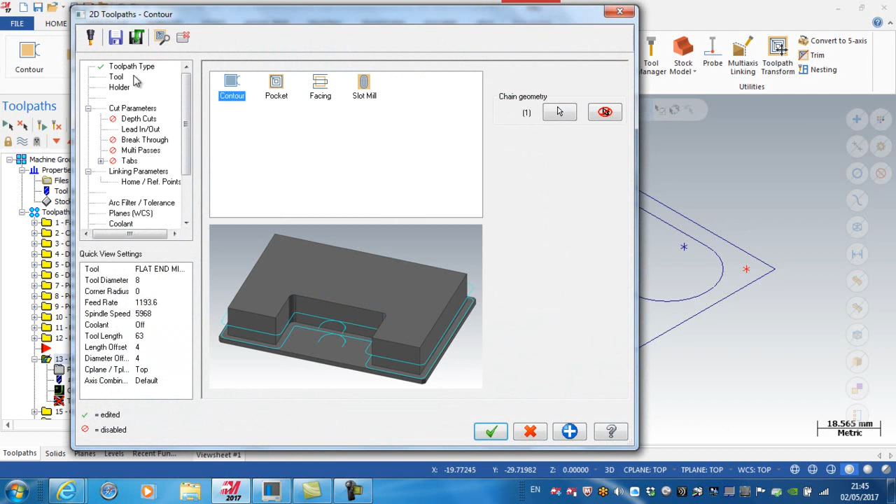Therefore the tool remains the same with the same speeds and feeds. I'm just going to put a comment in here: Finish 18mm diameter. I'm going to look at the cut parameters, and here I'm going to ensure that the compensation is set to control. Therefore I can change the size of the hole by modifying the radius value of the tool.

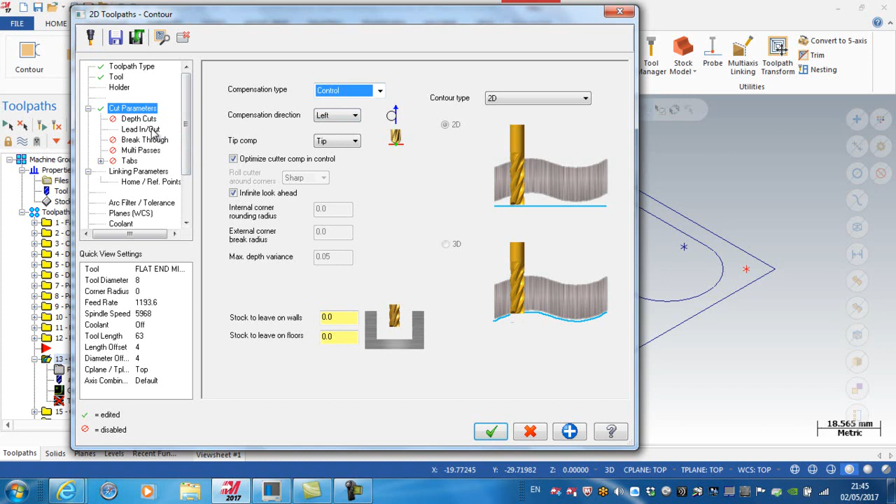In other words, this will output a G41 or G42 in my code. My cutter compensation is to the left, so obviously it's going to be a G41 in my code. Stock to leave in the walls is 0, stock to leave in the floors is also 0. And I need to put a lead in, lead out - I'm just going to go with the defaults for now.

We look at my linking parameters, and again everything is set to absolute, so I'm going to have my final depth as -11. Okay, my feed plane at the moment is set to -10 absolute, so I might just put that back up to 3 for now. If I was to verify this, I'm going to select the pocket and press and hold the control key.

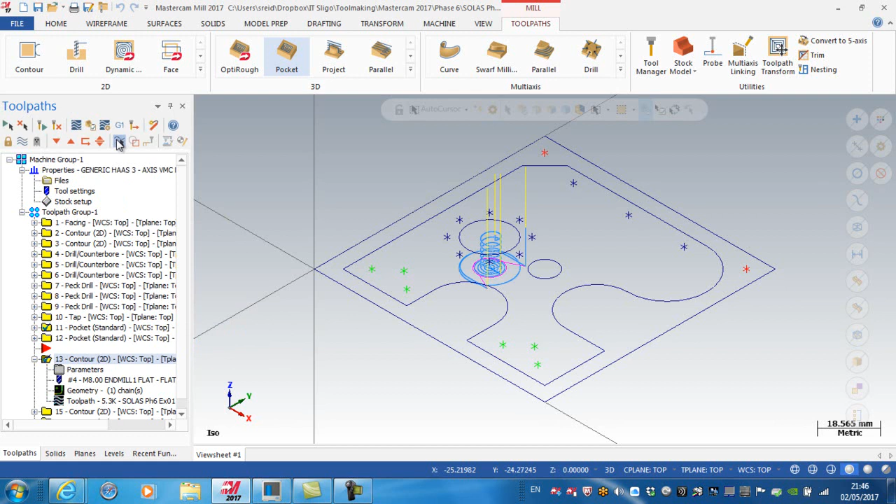Which allows me just to select those two operations. So I'm just going to verify those two operations. Okay, and I'm going to play. So this is my pocketing operation, and now doing a contour.

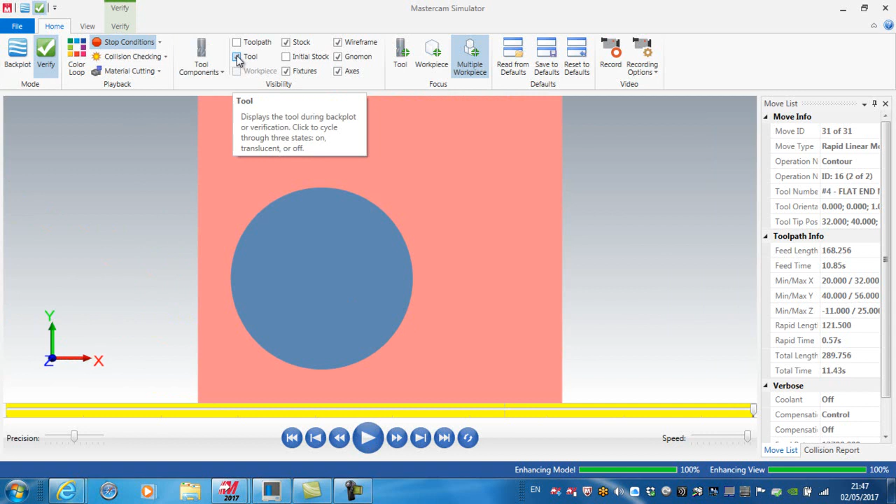So if I was to look down at the top and not show the tool, I'll actually make it invisible. You can see now that obviously my lead in, lead out is causing this issue, creating this unwanted slot, we'll say, on this side of the pocket.

So close down my verification. I'm going to regenerate the selected operation. Okay, so what Mastercam does here in this situation is the tool comes down on the center of the blue line, okay? And as it travels along the blue line, it will apply its cutter compensation.

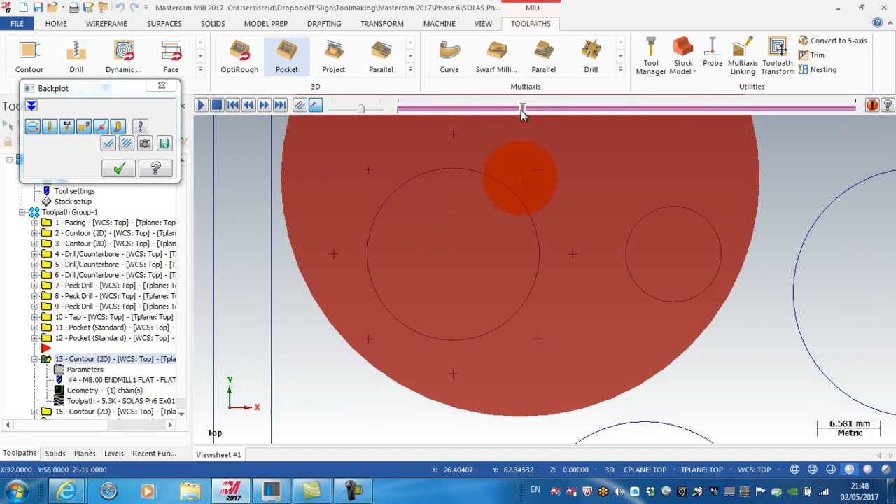So again, if I was to backplot that, we might see that. So the tool is coming down on center here, and that's where it's putting in this gouge in there. So the purple line represents the predicted toolpath of the center of the cutter as it travels.

In other words, my lead in, where I start cutting, has to be inside the purple line. So I'm going to modify my lead in, my lead out. So go to my parameters, go to my lead in, lead out. And what I'm going to do here is make the length of the line 5mm.

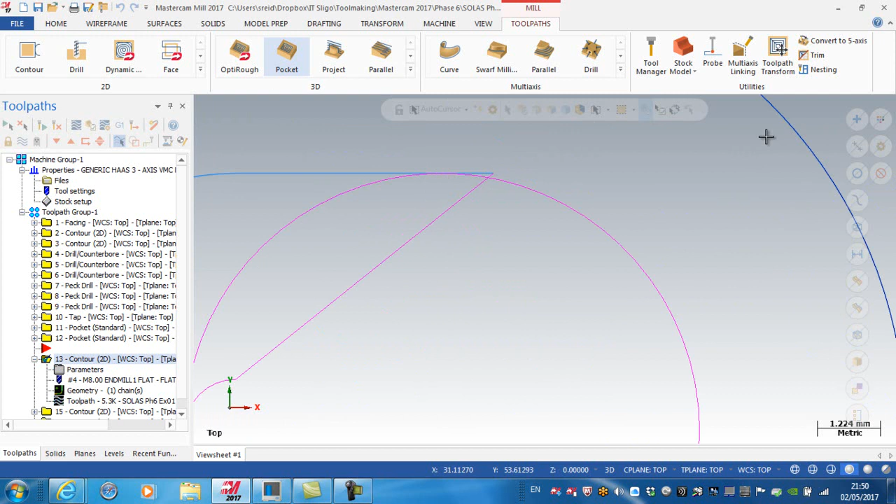And I'm going to make the arc radius 5mm. And again, I'm going to copy that to the exit and apply it and regenerate. Now you can see I'm getting much closer where the cutter is coming down on center here, but obviously if it's on center here and this is the predicted path of the center of the cutter to finish this diameter, therefore I'm going to again get the slightest little gouge on the part here.

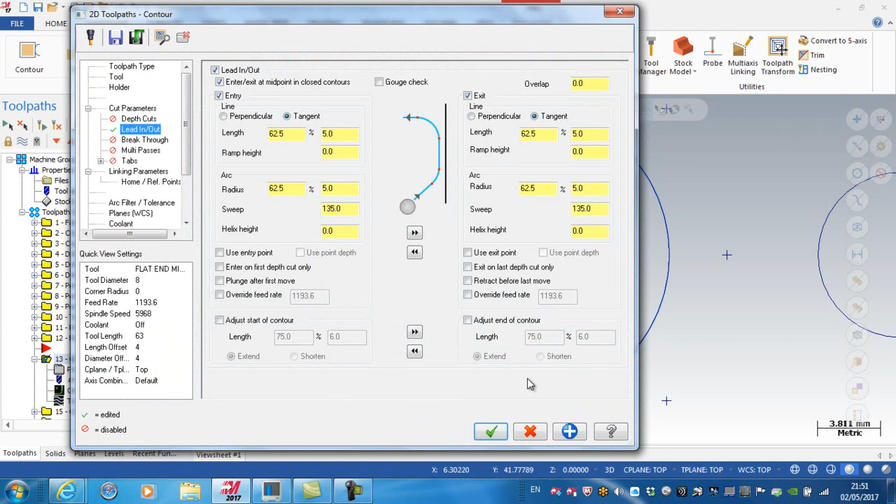So I need to still adjust my lead in and lead out further. So back to my parameters. And here what I'm going to do is increase the sweep angle to say 135 degrees. And again, I'm going to copy that to the lead out, apply, and regenerate.

Now you can see that the cutter is going to come down here on center. As it travels along the length of this line, it will apply cutter compensation, and then have a small arc, wrap around and down. So this then should be fine.

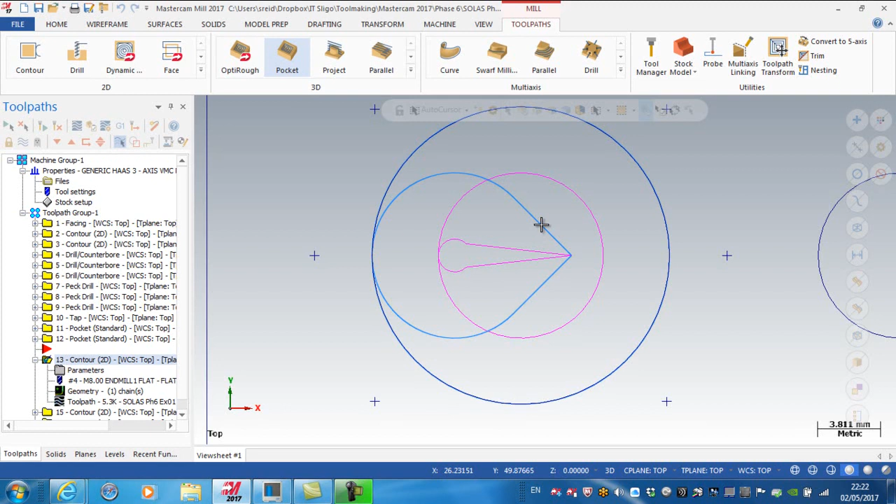Okay, just another point that's vitally important here when you're creating lead in and lead outs with cutter compensation applied on the control or on the machine, is that the length of the lead in here, the length of the line, has to be greater than the radius value of the tool. So I can call this an 8mm cutter, which is going to have a 4mm radius, up to 5mm radius, and still be able to run that on the machine.

Okay, another tip that I would say here is I have to be mindful of the fact that I've left 0.5mm of stock on this sidewall. So if I wanted to rapid it down into the hole, in other words not plunge or not feed down, I want to make sure that the cutter is not cutting on the way down.

So therefore, I'd need to have a greater distance of 0.5mm from here to there. You can see here, this is very rough, but there's roughly about 1, 2, 3, 4 cursor lengths across this 3.6mm here, so there's 1, possibly 2 cursor lengths, if that makes sense. So it'll be half of 3.6, roughly 1.8mm from there to here. So I am 1.3mm clear of the sidewall of the roughed pocket.

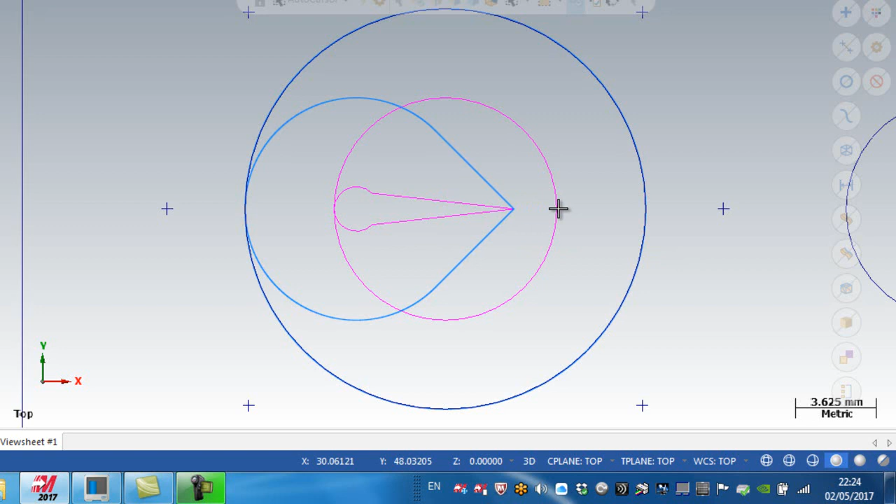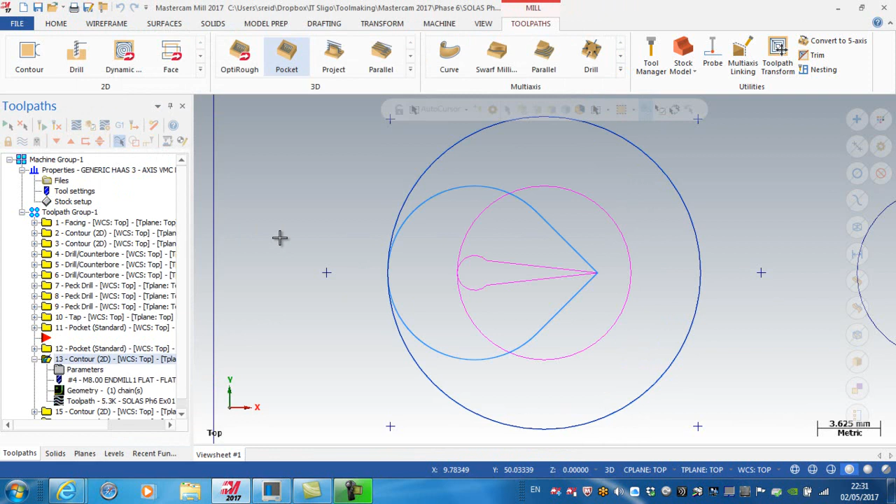Just to check that out, if I go back to my parameters and look at my linking parameters, and have my feed plane now going down to -9, so I'm rapiding 9mm into the hole, and if I regenerate that operation, pressing Control and selecting the pocket, I'll verify both of those operations.

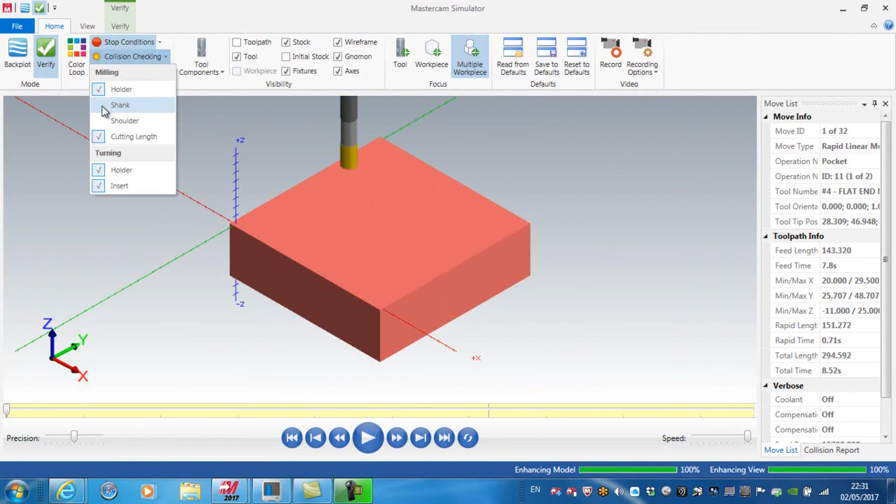Here what I'm going to do is turn on the tool again, and have a stop condition for collision, checking between the holder, the shank and the shoulder, and play. So again, my pocketing operation, rapiding down, putting on my finish contour. I have no collisions, which is very important to check if you're rapiding down below the top surface of the job.

Moving on, what I want to do is copy this contour toolpath down, so I'll minimize it. Generally I like to use my insert arrow, so I'm going to move that down below this toolpath. Highlight it, right click, drag, and say copy after.

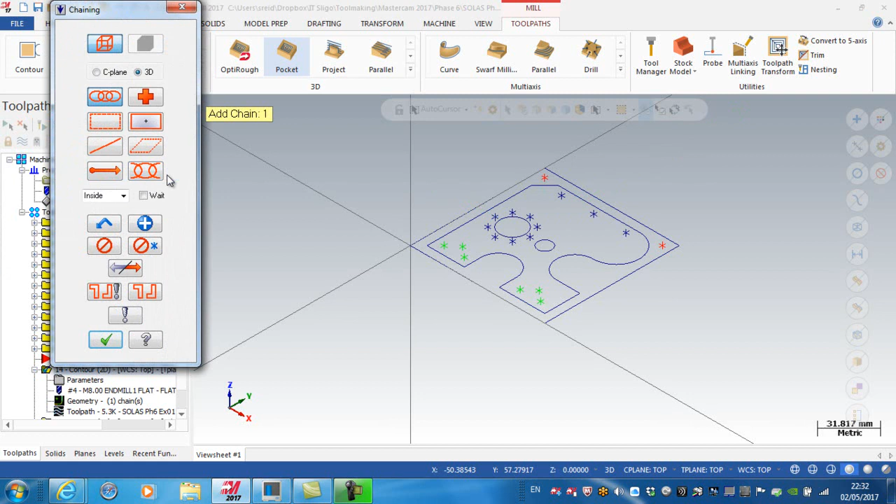So expand it, go into the geometry, rechain it, and again checking my C plane, top. Just zoom out here, picking just after the 3 o'clock position so that I'm going around in this direction, so I'm climb milling.

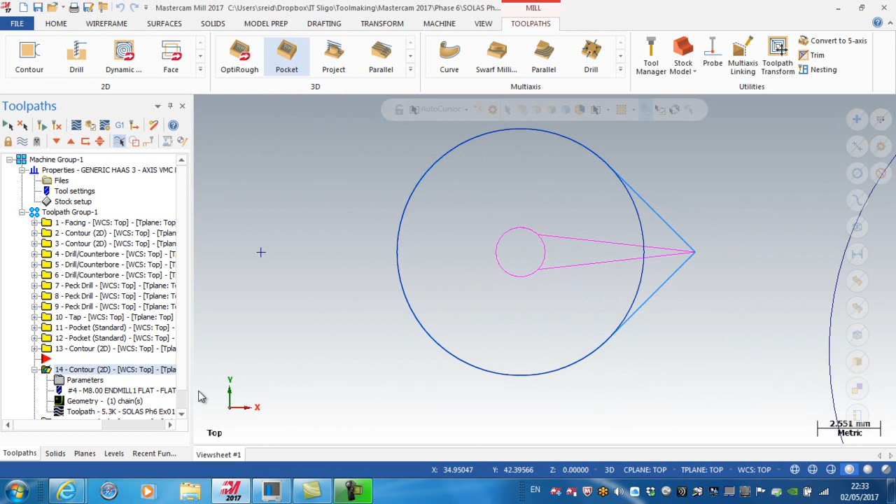If I regenerate this, you can see I have a problem straight away where my toolpath is starting here. So I need to adjust my lead in and lead out. Really there's only one option I would use here, is I go back to my lead in, lead out, and make it perpendicular as opposed to tangent.

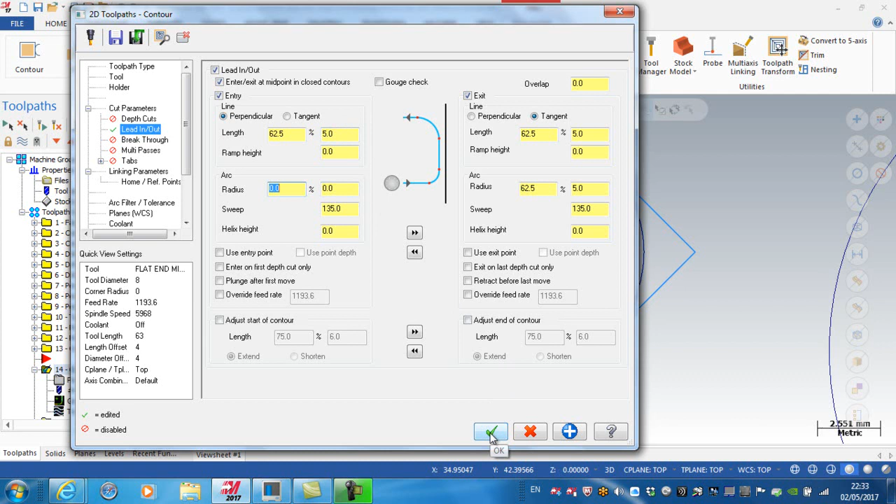I take off the arc radius, essentially putting that in as 0, and leaving the length of the line to 5mm. I'm going to copy that again to the lead out or the exit, apply it, regenerate it, and look at it in an isometric view.

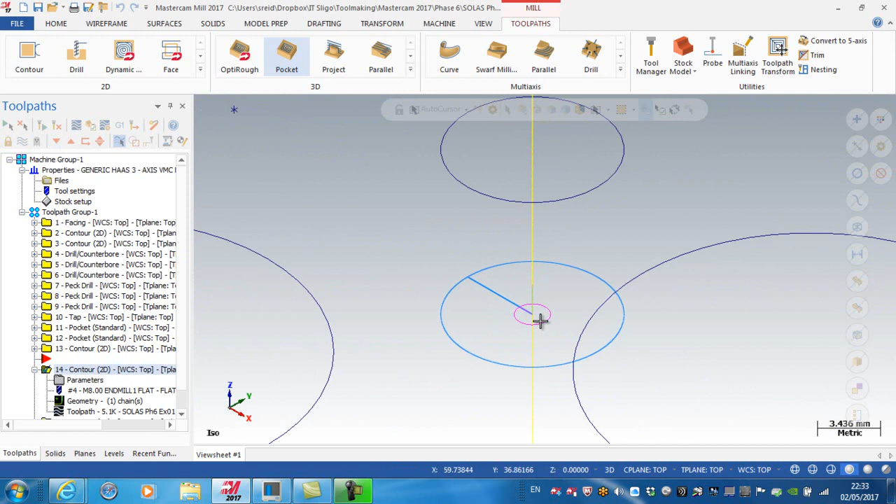So now what's actually happening is I'm rapiding down to -9, feeding from -9 down, moving out along this line and around. We might need to regenerate that, and you'll see the purple line. But the advantage of having the lead in exactly 5mm, because this is a 10mm diameter hole, is that the tool is rapiding down in the center of the hole.

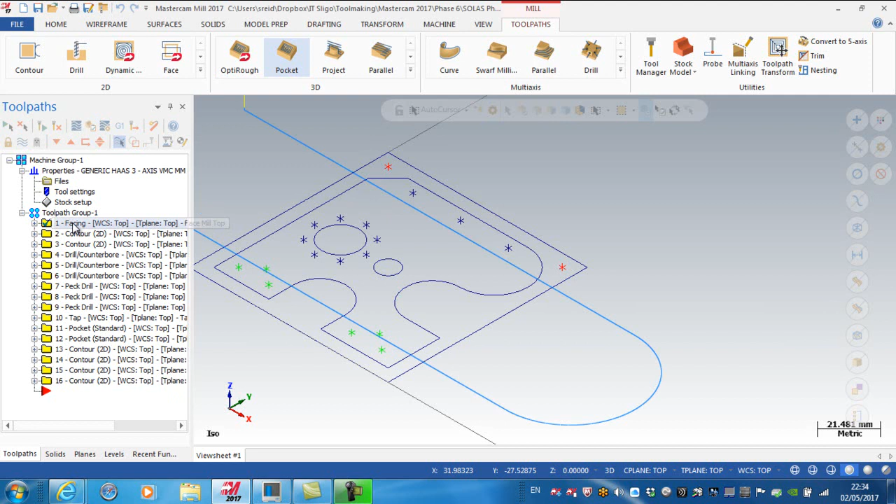So finally, I'm going to make sure I have everything in the correct sequence. I've got a face mill operation, a contour roughing around the outside, a multi-pass contour roughing the inner profile, spot drilling the first set of M5 tapped holes, spot drilling the 4mm holes, and again spot drilling the M5 tapped holes at a lower level.

Peck drilling the 4mm holes, peck drilling the M5 holes at this level, and peck drilling the M5 holes at the lower level. Then tapping, using the same tapping operation and going down the same depth with the tap, so tapping all of the holes. Then pocketing the 18mm diameter and pocketing the 10mm diameter.

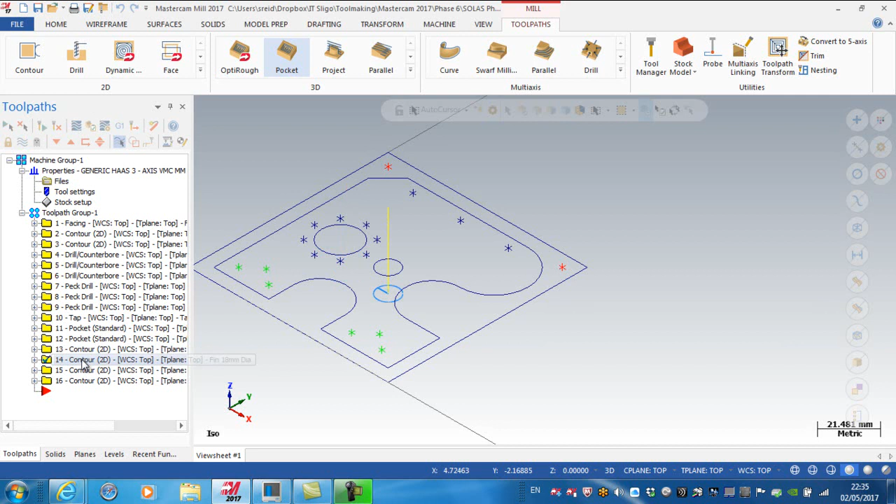Again, a finish pass of the 18mm diameter with cutter compensation applied in the control, a finish pass of the 10mm diameter with cutter compensation applied in the control, a finish pass going around the outside profile with cutter compensation in the control, and the inner profile again with cutter compensation in the control. So my sequence of operations is good.

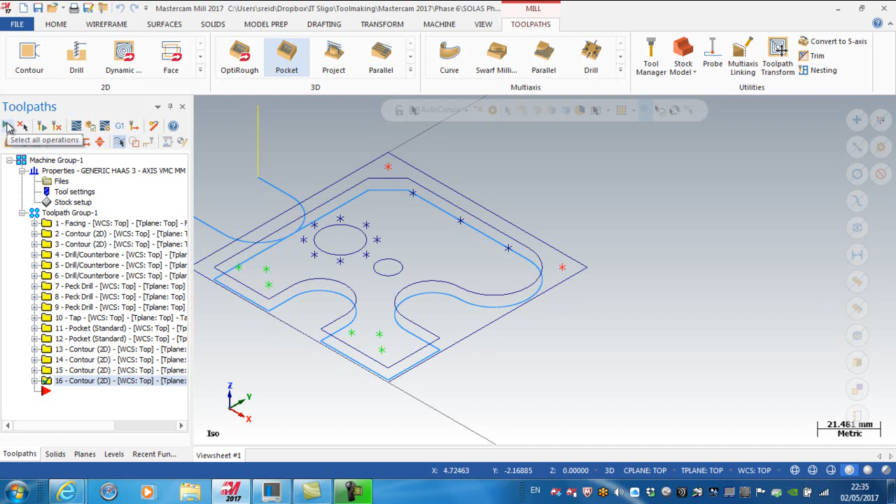I'm going to select all operations, verify, and again I just want to make sure my stop condition is set to collision. When checking for collisions, I just have my stop condition set to collision. So play.

So my face mill operation, roughing, leaving material on the sidewall. Again, multi-pass contour here - not the ideal toolpath, but we can look at those in later videos. Spot drilling my holes, slightly deeper because they're tapped M5 than the 4mm holes I'm now currently spot drilling.

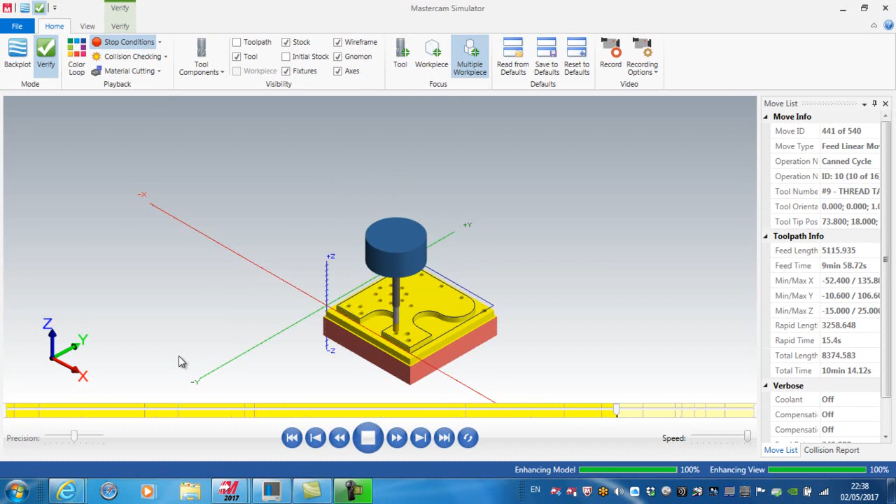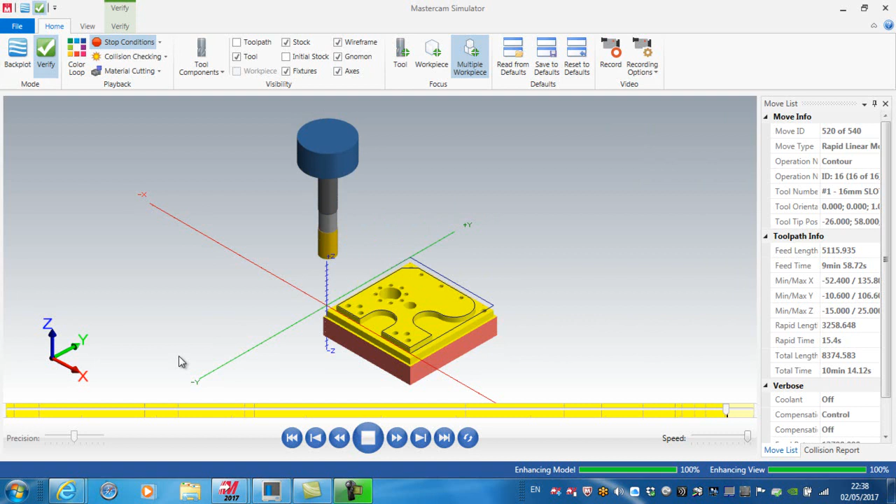I'm now peck drilling the holes, peck drilling the M5 holes, tapping the holes, my pocketing operation, and again the pocketing operation, a finish pass, change tool, finish pass going around the outer profile, and a finish pass on the inner profile.